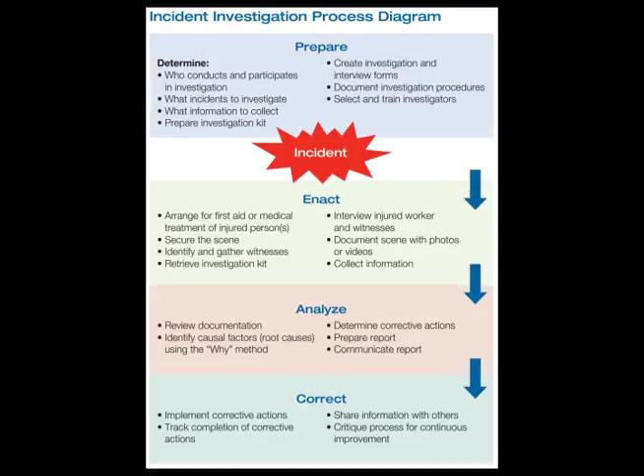Case 1, Forklift Mayhem. Tammy Lynn was known as the fastest forklift driver in the county and broke the Tri-County forklift land speed record. Investigators proposed that Tammy Lynn was speeding and lost control of the forklift, striking a high-pressure tank containing explosive material.

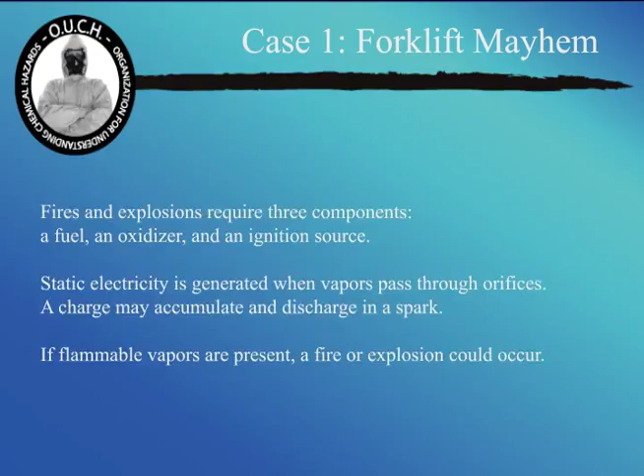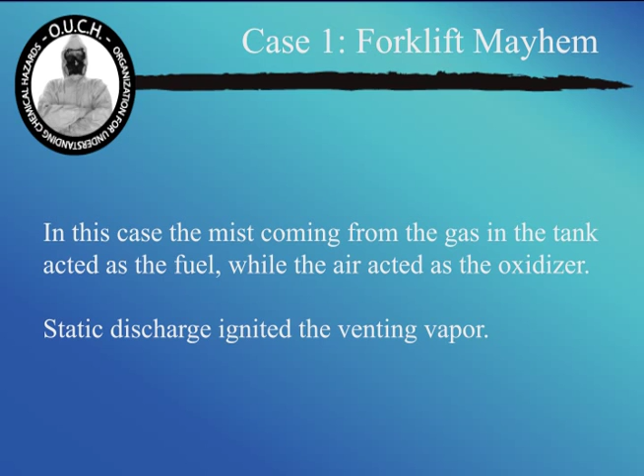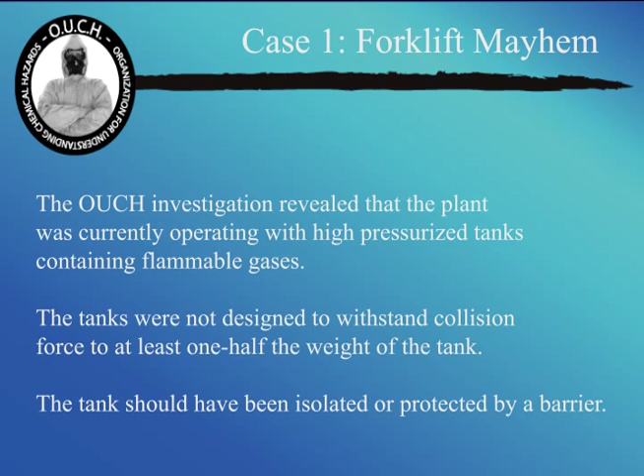In this case, the mist coming from the gas in the tank acted as the fuel, while the air acted as the oxidizer. Static discharge ignited the venting vapor. Investigation. The Ouch investigation revealed that the plant was currently operating with high pressurized tanks containing flammable gases. The tanks were not designed to withstand a collision force to at least 1/2 the weight of the tank. The tank should have been isolated or protected by a barrier.

Ouch proposes that a possible ignition source was the static electricity generated from the vapors passing through the orifice of the tank. Based on the investigation, Ouch suggests: 1. Protection barriers should be placed around high-pressure tanks. 2. Reduce forklift operating speed. 3. Forklifts should not be used around pressure vessels.

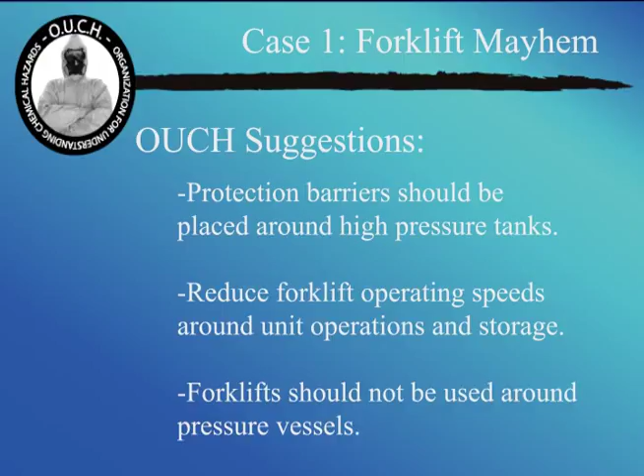Case 2. External ignition that led to the tank explosion. A high pressure and temperature tank containing potentially explosive material was coated in a flammable substance. The substance was an experimental hydrocarbon-based polymer that has been described as a cross between flubber and Nickelodeon slime. Plant operators had just completed a slime war, which caused the polymer to be scattered throughout the plant and process equipment.

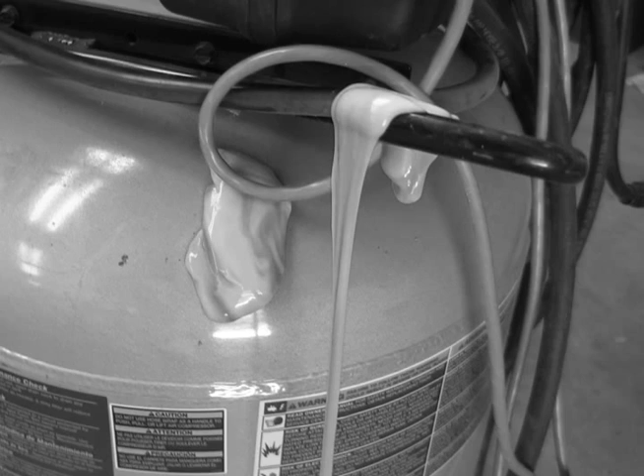Fire and explosion safety. Unfortunately, in this particular case, the hydrocarbon polymer acted as the fuel, while the atmospheric air acted as the oxidizer. The Ouch investigation revealed that the plant was currently operating with outdated and unmaintained electrical systems. Documentation shows that frayed electrical wires were common throughout the plant, along with damaged electrical outlets and connections. Poor housekeeping led to tangled electrical wires and process equipment.

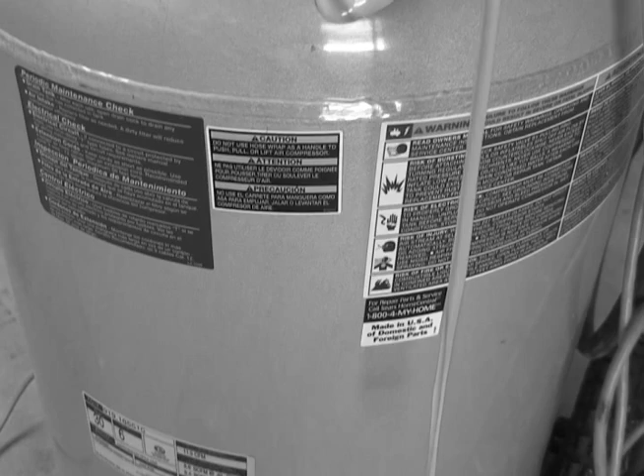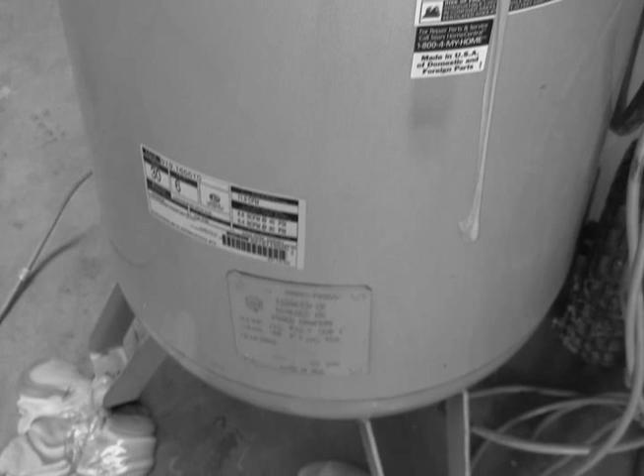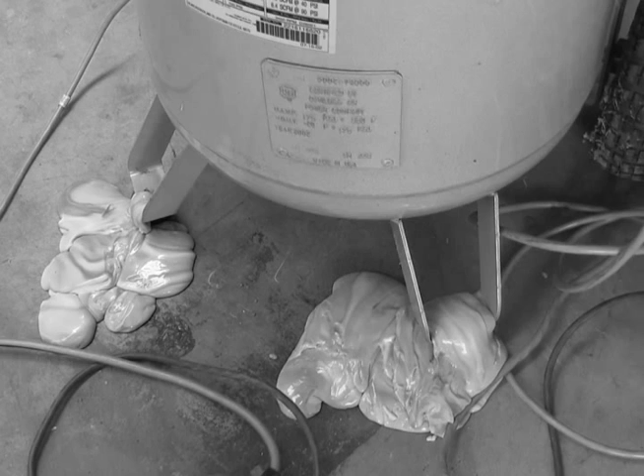Ouch proposes that a possible ignition source was the frayed electrical wires in contact with the flammable polymer. After combining with oxygen in the air, the resulting fire compromised the pressurized tank. If the initial fire or explosion was isolated from the pressurized tank, significant damage could have been avoided.

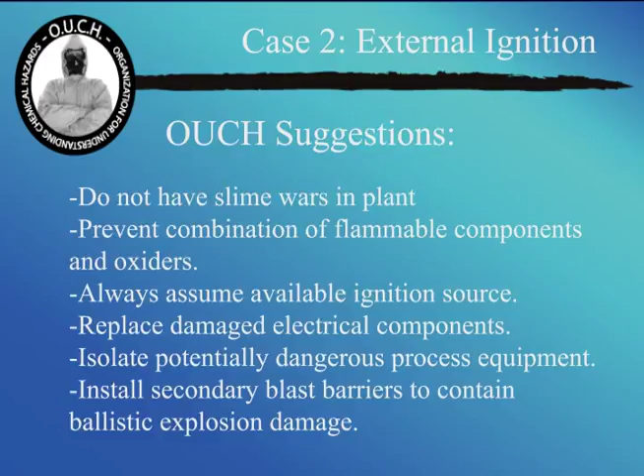Case 3, Pressure Pickle. The Ouch investigation suggests the possibility of a problem in design and operation of a pressure relief valve. Evidence found after the explosion reveals that a crucial relief valve was designed and installed improperly. Further investigation showed the plant safety valves were poorly maintained for the years leading up to the accident.

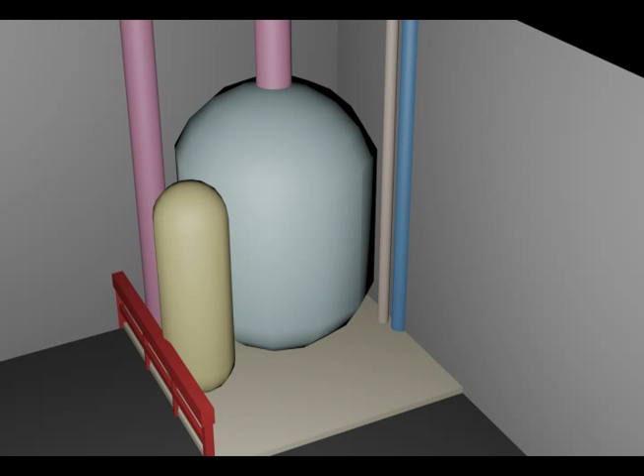Under normal operation, a pressure relief valve is used as an important safety feature for vessels under pressure. As pressure in the tank increases due to an unscheduled event, the process control system applies pneumatic pressure to open the valve. This allows for excess pressure to be released. After the excess pressure is released, the valve closes. This can be repeated indefinitely and ensures safe operation of the process.

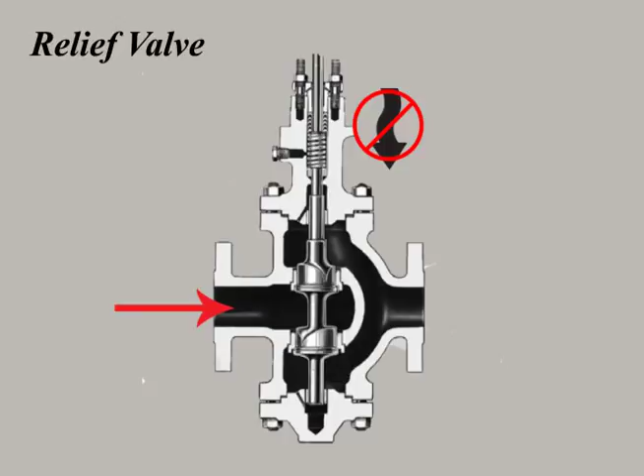However, the mode of the valve operation is important. For any possibility of overpressurization, the valve should be able to open without a control system. This is known as fail-open valve operation. On the day of the accident, Ouch proposes that the control system was unable to open the valve, or the valve was improperly maintained. This inability to reduce operating pressure resulted in the rupture of the tank and a subsequent explosion. Ouch recommends pressure relief valves that use springs or diaphragms to operate without external control systems.

Ouch suggestions. Specially designed pressure relief valves should be used on all pressurized vessels. Secondary safety valves that do not require control, power, or air supply should be used in addition to controllable valves. Routine maintenance and inspection of all safety valves within the plant.

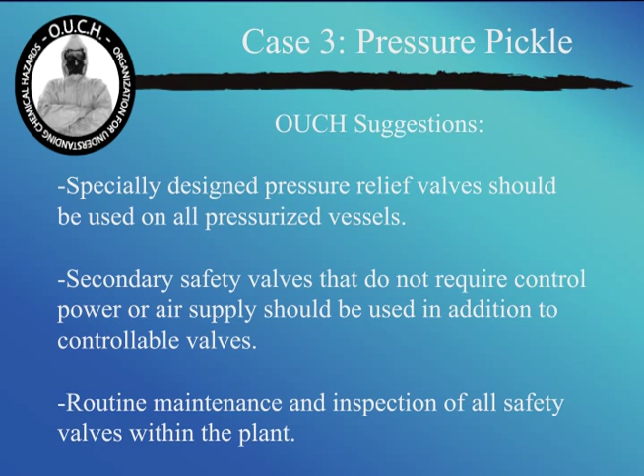In conclusion, the actual cause of the catastrophic explosion is unknown. Through the process of accident investigation, 3 major issues have been identified in company policy, implementation, and behavior. The dangerous culture of speed and negligence around forklifts should be reviewed and eliminated in further company actions and development. Worker handling of novel materials around existing and dangerous plant operations should be minimized.

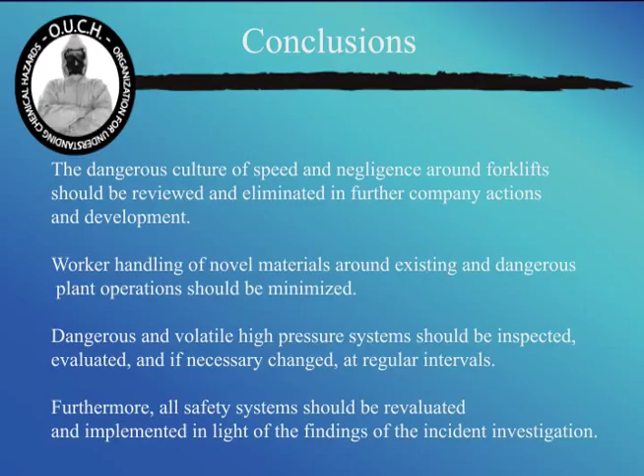Dangerous and volatile high-pressure systems should be inspected, evaluated, and if necessary, changed at regular intervals. Furthermore, all safety systems should be re-evaluated and implemented in light of the findings of the incident investigation. Incident investigation is an integral part of ensuring any accident is critical learning time for a company. Learning from the mistakes of the past can allow a company to move ahead after times of tragedy and destruction and prevent future problems.